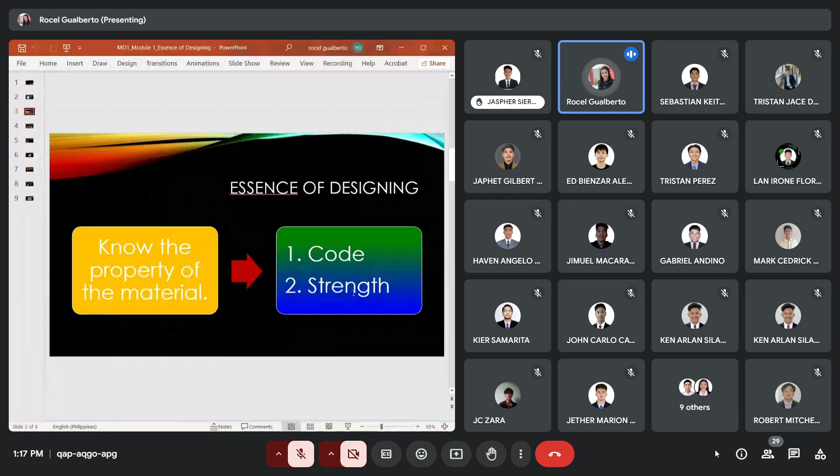Okay, so we have this design. First is to know the strength, obtained on our design table. So you simply copy the values of sigma u and sigma y doon po sa design tables natin. And then after that is for you to come up with the suitable factor of safety.

So for the factor of safety, we call this also our design factor, and it depends on these three: the kind of load, the type of material, and the basis of design. Indicate yung tatlong ito before you come up with your value of factor of safety taken from table 1.1. As for the kind of load, you are to assume a dead load if it is not given. And for the basis of design, you would be following yield strength for a ductile material and ultimate for the brittle material.

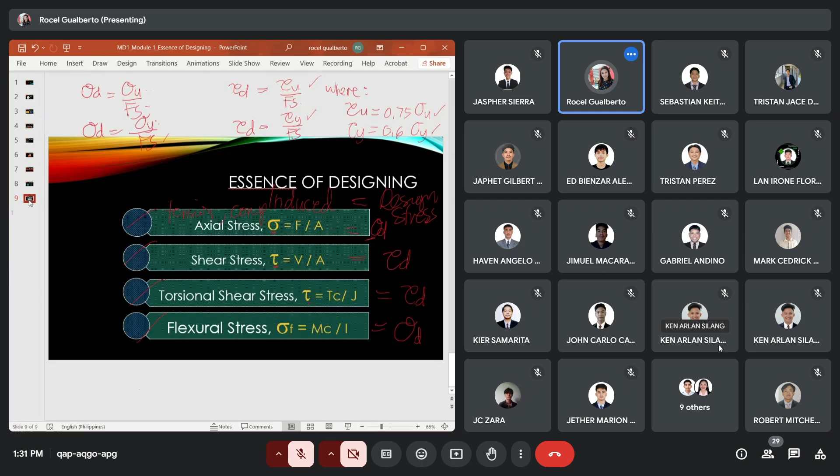Ito naman. Okay. Yan. Okay na ulit. Hello. Okay na ulit. Yes po, ma'am. Okay. Lagi nawawala. Wait lang. Ano napindot ko? Option. Okay, okay.

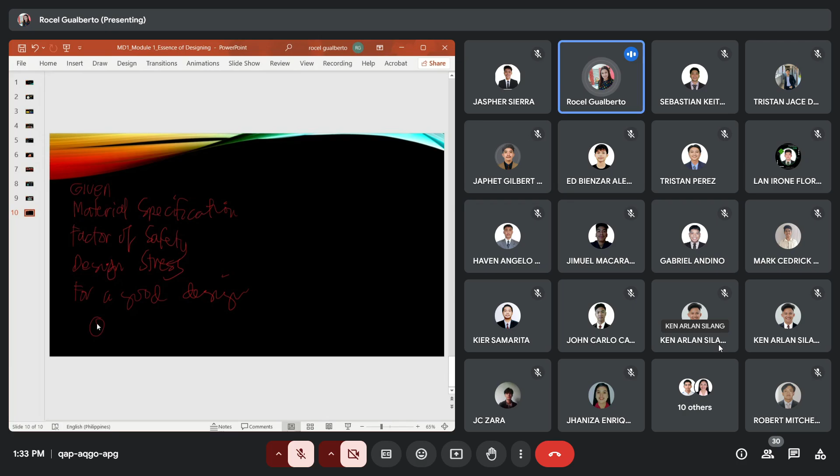Know the property of the material as to code and as to strength. So, ang tawag po natin doon ay material specification. Ang ilalagay po yung code at yung sigma U, sigma Y. Ang kasunod po nun, apply a suitable factor of safety. So, after po ng factor of safety, it's for you to determine the design stress. And then, kasunod po ng design stress, yung pang-apat, yung solution for a good design. You then equate the design stress to the induced stress of the material.

Okay, so ito po yung members under pure tension or pure tensile load. Ito po yung sample member po natin. And then you come up with this. Ano ang unang nangyari? You have there the elongation. Pertaining to the original length, nabago po yung kanyang final length, mas humaba. And also, you come up with this, that is the narrowing of your cross-sectional area. And we call that necking.

So, pag nilagyan po natin ng force, tensile load or tensile force, yung ating material, you come up with the elongation and the necking or the narrowing of the cross-sectional area. So, yan po ang effect doon sa material, because this force tends to pull your material. Hinihila po niya, kung saan ang ating force is a tensile load or a tensile force.

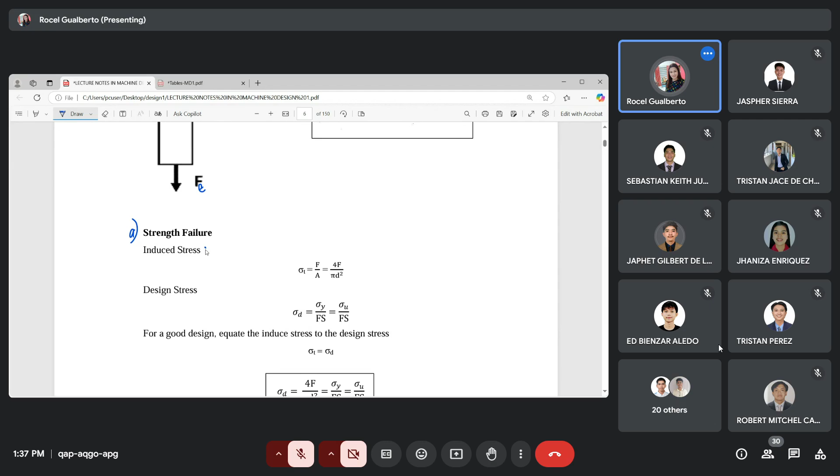So, ang tawag natin sa induced stress, sigma sub T equal to force, tensile force divided by the area. Okay? So, kung circular po yan, papalitan lang po natin yung area. So, the tensile stress would be equal to Ft over ano yung magiging area natin kung circular. That would be pi d squared divided by 4. Kung rectangular naman po yan, ano yung area doon? It would be base times the height or the length times the width. So, papalitan lang po natin yung area. So, ganyan po ang induced stress niya.

Pagdating naman po sa design stress, we say for design stress, it's equal to sigma u over Fs. Yan po yung design stress. Now, why are we using here sigma? Bakit po ma'am hindi yung tau? Kasi ang ating induced stress is tensile. And based on yield naman, then sigma d would be equal to sigma y divided by factor of safety. Okay, so titingnan mo ngayon yung problem kung ano ba yung basis of design.

Kung alin yung sinabing basis of design, edi pipili ka dito sa dalawang equation kung alin yung magiging design stress mo po. Kung hindi po binigay yung basis ng design, ano po ang gagawin natin? Ang gagamitin po natin yung default. Ductile is for yield, brittle is for ultimate. Yun po ay pag walang binigay na basis ng design.

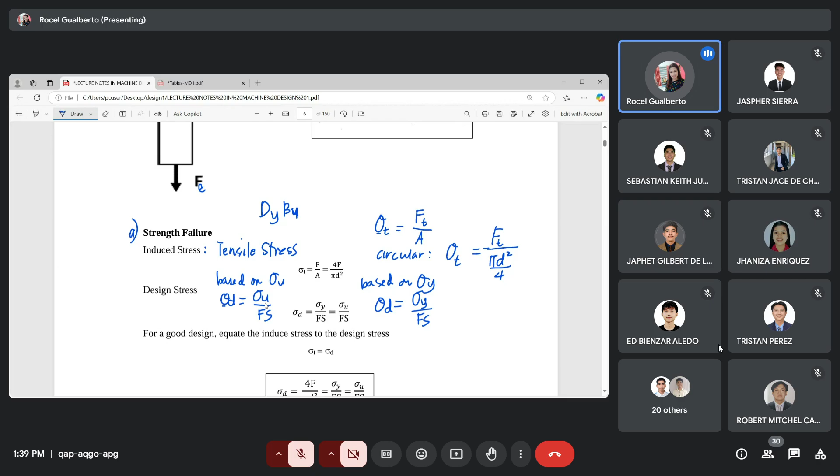Now, design for induced stress and the design stress. So, equating the design stress and the induced stress, ulitin ko lang po dito, for a good design. Equate now the design stress to the induced stress, which is the tensile stress. So, the tensile stress is simply force over the area equal to your design stress. So, kung yan po uli ay circular,

and based on ultimate strength, what will be our equation now? Yung sigma din natin magiging sigma u over factor of safety equal to Ft over pi d squared over 4. So this will become equal to 4Ft over pi d squared. Yes, Ft is usually given, therefore, we can solve for the diameter. So, masosolve mo po yung diameter base doon sa ating strength failure.

Kung base naman po siya sa yield, ano naman po ang magiging equation natin? Sigma y over factor of safety equal to, pareho po, pinalitan po natin yun. So, magiging sigma y over Fs, so this would be 4Ft over pi d squared. Nandito lang po uli sa table, tapos given, tapos you can solve again for a diameter.

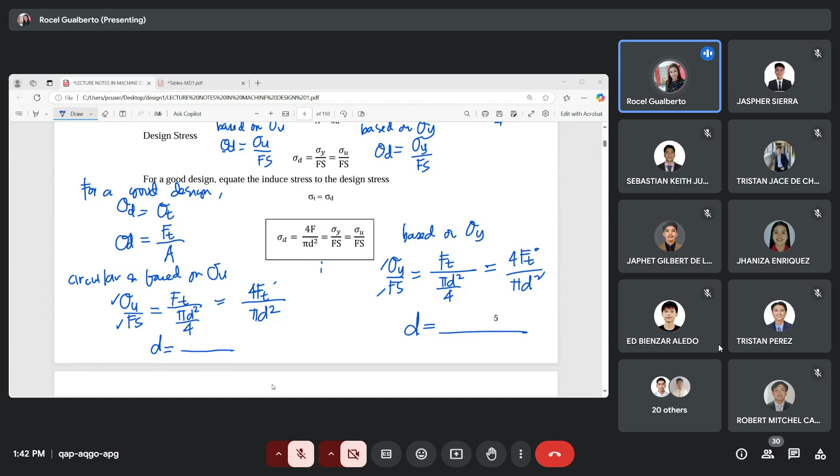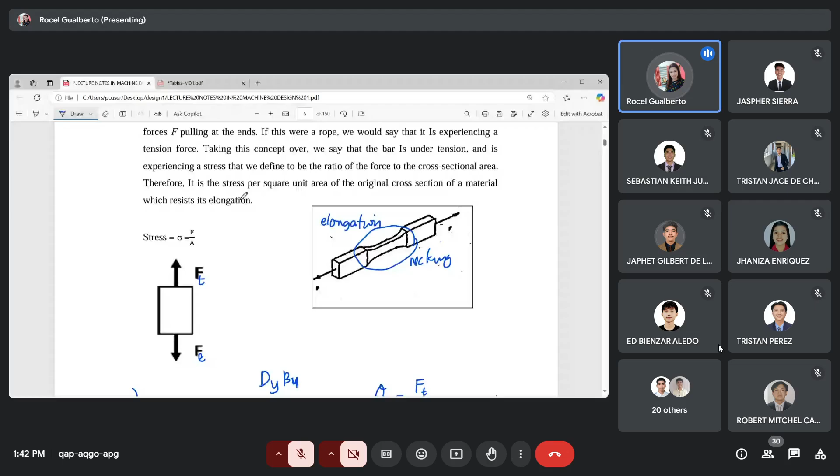So, sabi natin kanina, nung in-applyan natin ng load yung ating machine member, nagkaroon siya ng elongation at necking. So, base din doon, kukuha tayo ng dimension. So, ang tawag naman po natin doon, ito po yung pangalawa, that would be our deformation failure. So, kuha ka ng dimension base sa deformation failure.

Nung in-applyan mo po siya ng tensile load, humaba po siya. So, ito po yung na-increase na length po niya. Ang tawag po natin dyan, yan po yung deformation. But then actually, this deformation, yan na po yung elongation. So, this is basically a change in the length, the final length minus the original length. And how do you measure that deformation? Paano ba mina-measure yung deformation? The deformation is simply equal to FL over AE.

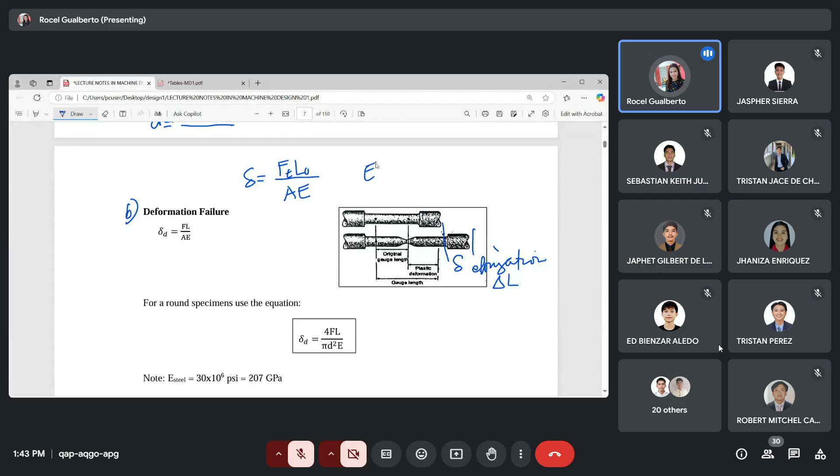Kung nare-recall nyo po yan, deformation is equal to FL over A, area of the cross-section, and E, the modulus of elasticity. So, modulus of elasticity po ang tawag po dito. So, saan ko po ma'am kukunin yung value ng mga components po na yan? So, ang Ft po, again, that is your tensile load. Original length po ito. Area and then modulus of elasticity.

So, kung yan po ay circular as our sample, yung A lang po yung papalitan. So, the deformation would be Ft L sub o over pi D squared over 4 times the modulus of elasticity. Kung siya naman po ay rectangular, ang area po ay magiging length times width or base times height.

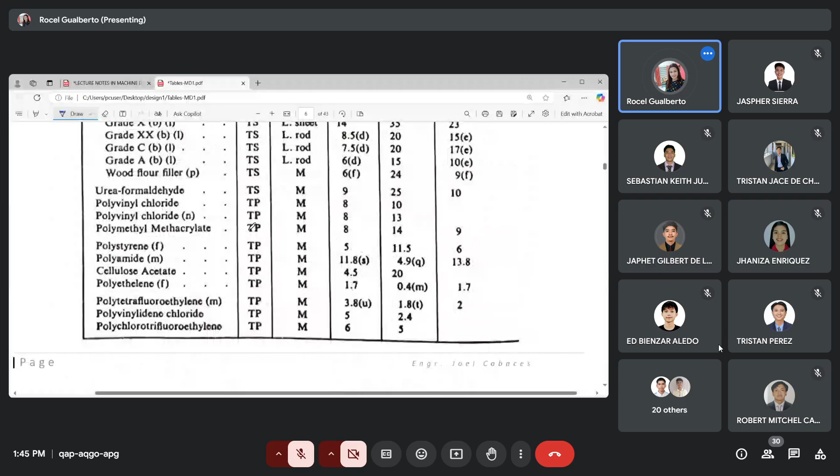Halimbawa, you go to table AT 7 po. Yan, okay. So, ano po yung table AT 7?

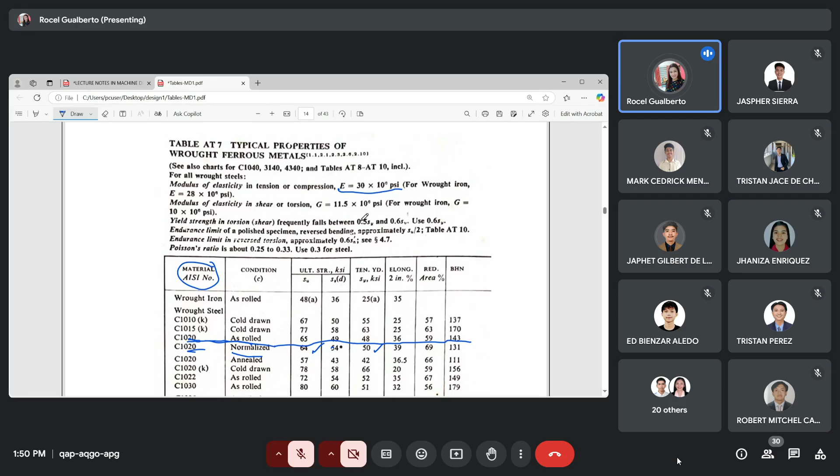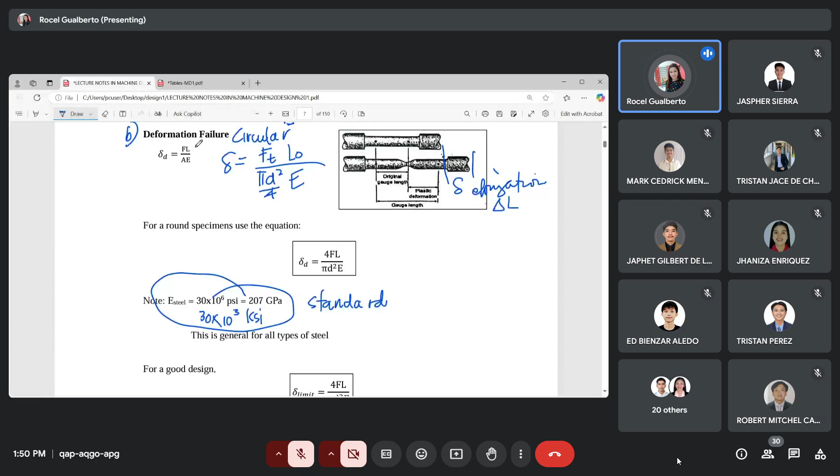Okay? Next. So, sunod po. How do we arrive at the dimension po? Okay? O, kapag nag-design po tayo. Katulad po kanina sa strength, anong sabi natin? For a good design, you equate the design stress to the induced stress of the material.

Dito naman po sa deformation failure, for a good design, ano po naman i-equate natin? We equate what we call the allowable limit of deformation to the computed deformation. So, we call this the allowable limit of deformation.

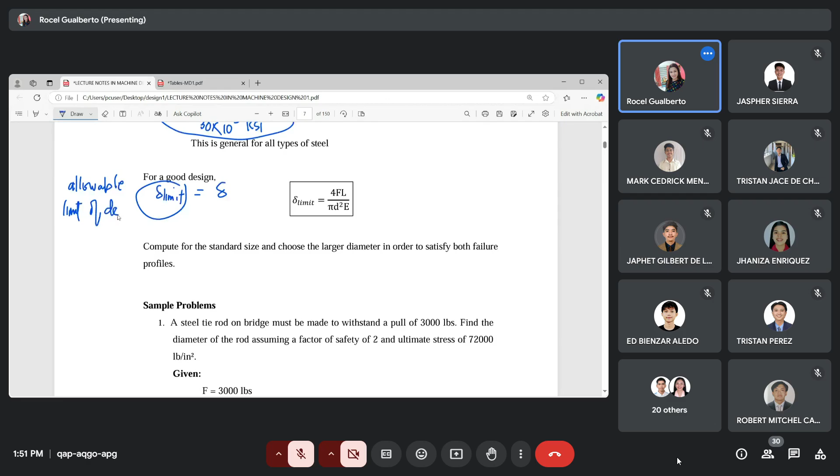Equal to the deformation itself, pi d squared over 4, equal to the allowable limit of deformation. So what is this allowable limit of deformation? In problems, sometimes it's stated that the member should not elongate more than 0.01 inch. That 0.01 inch is what we call the allowable limit of deformation. It means the deformation cannot be larger than that value. It is limited up to that value only.

So we can compute for the diameter. This is given: the force, the length, the E is taken from the table, then you can compute for the dimension or the diameter. So how many answers did we get?

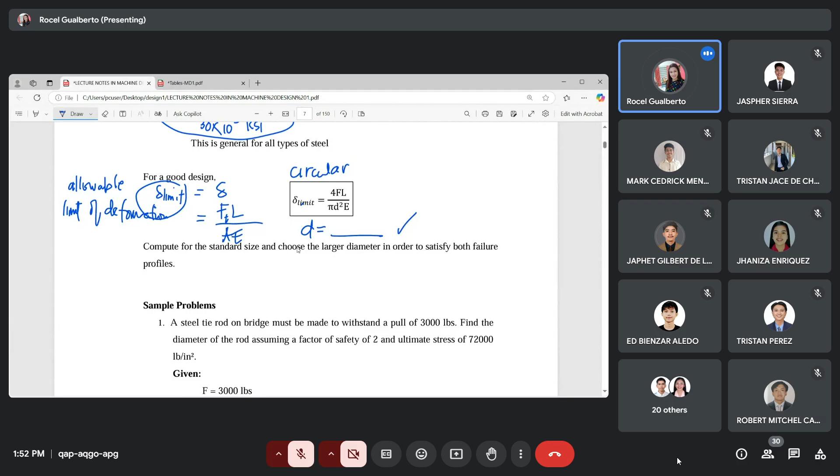One came from strength failure, and the other came from deformation failure. So we got two answers. But our final answer cannot be two. With these two, we choose which one is correct. You have to choose the larger diameter, or the larger dimension, in order to satisfy both failure modes.

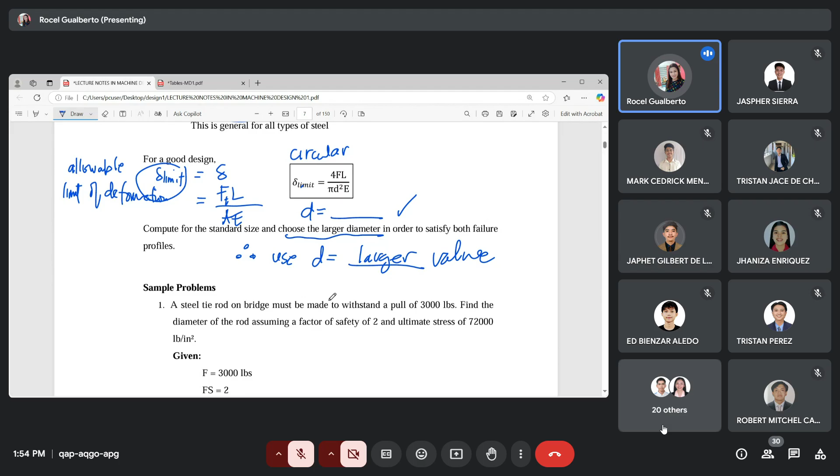Now, not at all times do we have deformation failure. It's not always present. It only happens when you are given this allowable limit of deformation. If there is no given allowable limit of deformation, our answer will only come from the strength failure, and whatever answer we get from the strength failure will be our final answer. Did you get what I said? Did you understand? Yes, ma'am, we understood. Okay, good. So let us have a sample problem.

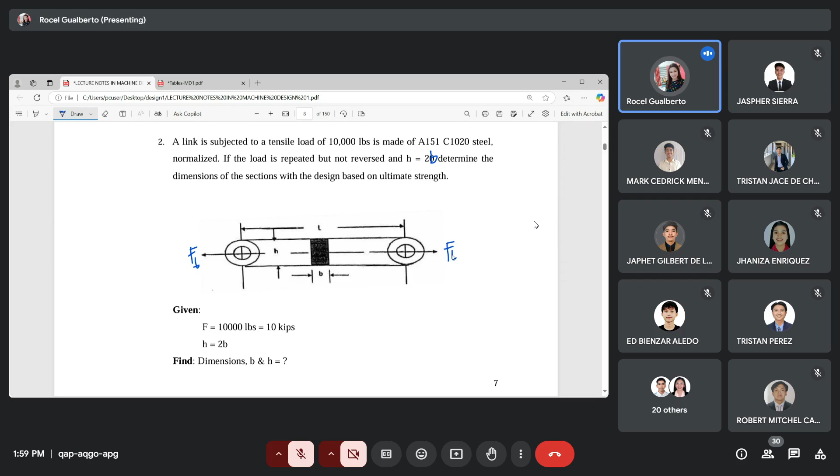So here is yung kung atin na link. This is the tensile load FT equal to 10,000 pounds, and this is its cross-section. And dimensions, H is equal to 2B. So let us then have this resolve.

I-resolve natin. And then, para mabago, ang gawin natin, instead of basing this on the ultimate strength, palitan natin, gawin natin ngayon siya na yield strength. So gawin natin based on the yield strength. Mag-solve ulit kayo, this time base naman yan sa yield strength. So hindi lang basta natin titingnan, or babasahin yung solution, kundi i-resolve natin kasi nabago na ang basis ng design.

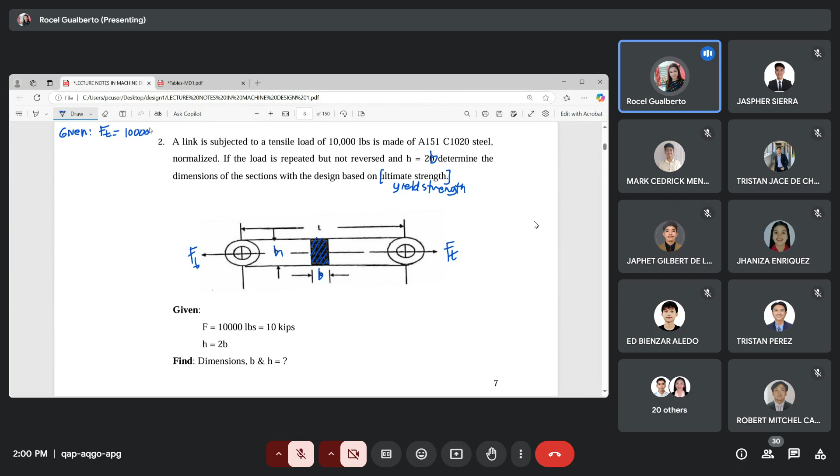Okay, let us start now. Here, you start with your given values. So ano po yung given natin? We start with the tensile load that is equal to 10,000 pounds, which is equal to 10 kips, divided by 1,000. Another thing, you have the relationship H is equal to 2B. So these are the given.

After the given, i-follow mo na po dyan yung atin na essence ng design. So ang una would be the material specification. Ano sa material specification? Code. So uunahin po ang code: AISI C1020 normalized. Tapos, ano po ang hahanapin? Yung sigma U, sigma Y, tapos idagdag mo na din po ang modulus of elasticity.

O, hanap muna po ninyo sa chat box ang sagot at ilagay din po kung sang table po natin nakuha. O, sige po, hanap muna po.

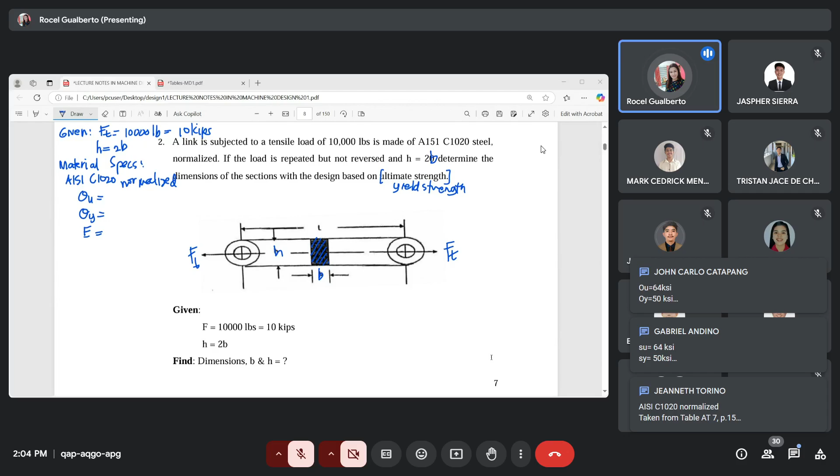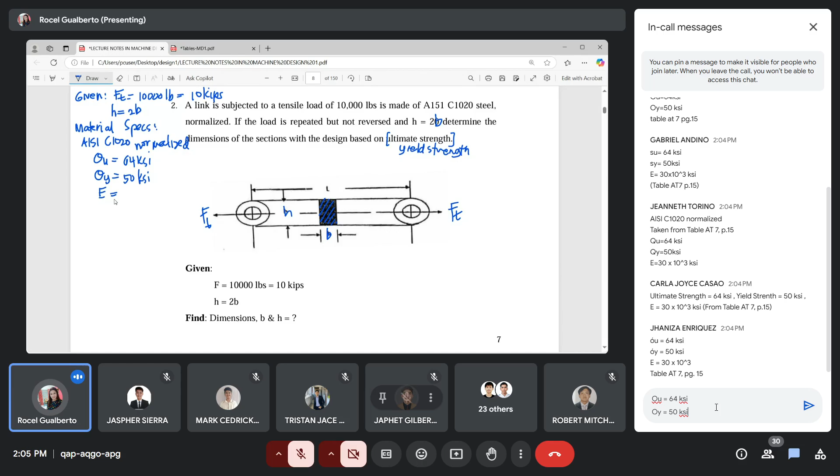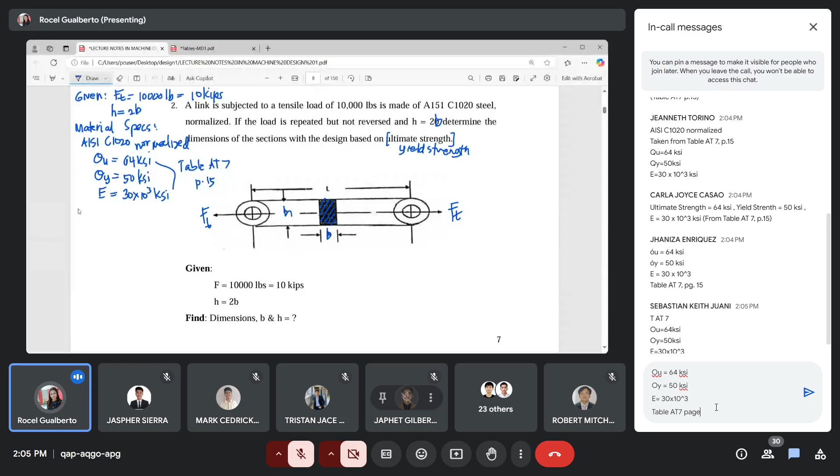After the material specification po, ang sunod po natin would be the factor of safety. Tatandaan nyo po ang procedure conditions, yun pong tatlong basis. Ano pong una? Kind ng load. Ano ang kind ng load? Stated po dito, repeated but not reversed. So, repeated but not reversed.

Tapos po, type ng material. So this is 1020, ano pong type ng material? AISI C1020 normalized. Ken Arlan? Yes po, ma'am. Ano pong type ng material? Ductile po ba o brittle, itong 1020 normalized? Ductile po, ma'am.

Hello? Hello po, ma'am. Ken? Hello po. Ductile or brittle ba yung 1020 normalized? Ductile po, ma'am, it's a ductile material. Bakit po siya ductile?

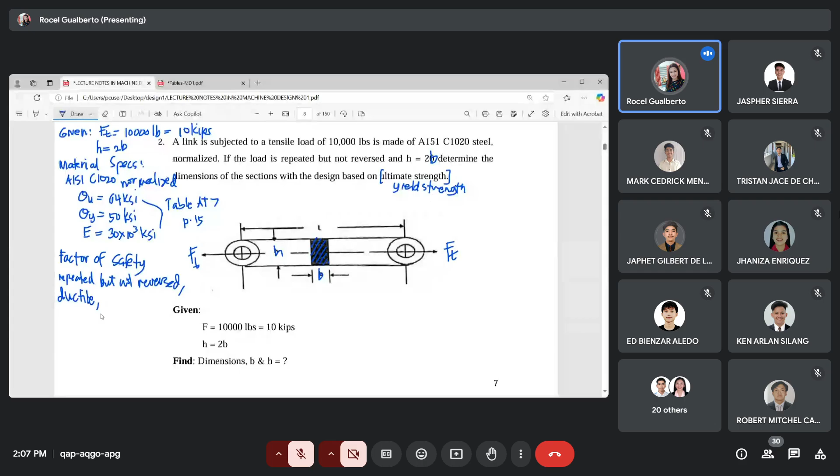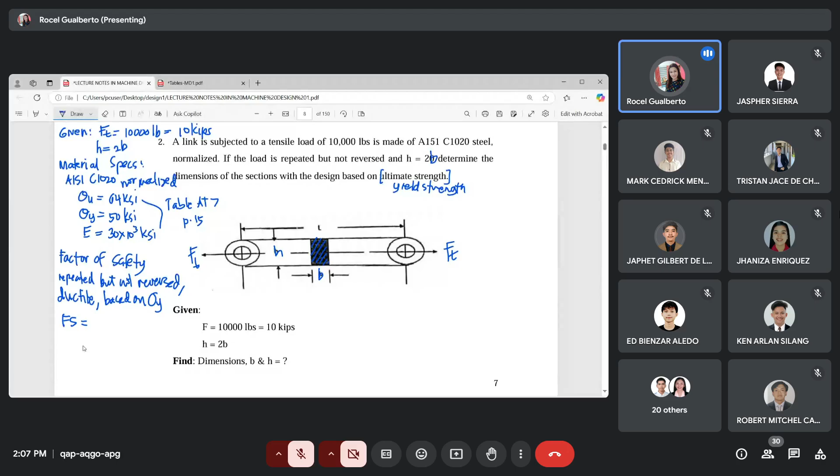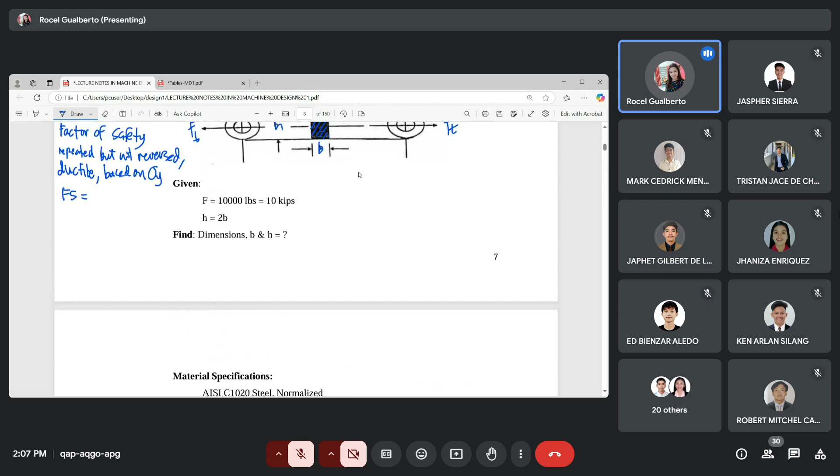Dun po natin siya titingnan sa table 1.1. Based on the yield, ano po yan? Equal to 3. So yun po ngayon yung ating magiging factor of safety. Fs is equal to 3, galing sa table 1.1, page 1.

Okay, and then after the factor of safety, ang kasunod po would be the design stress. Sa design stress, pipili lang tayo between sigma D and tau D. Ano po ang gagamitin natin dito? We will be using sigma D, dahil ito po ang ating induced stress is a tensile stress which is in form of sigma din. So sigma D equal to what?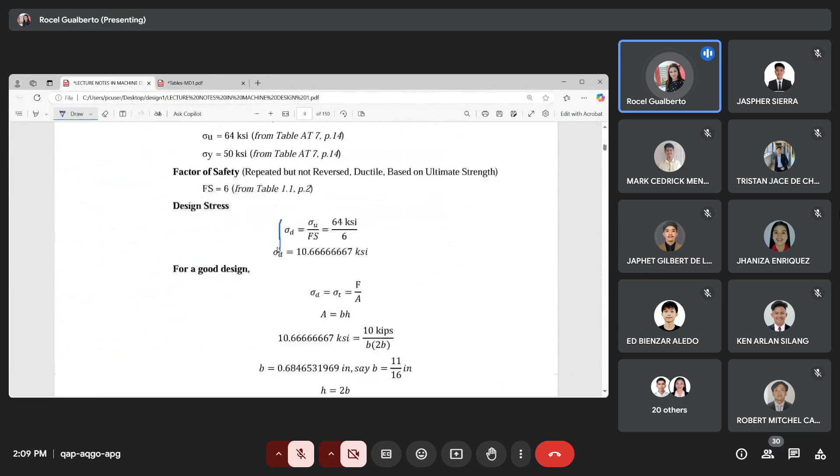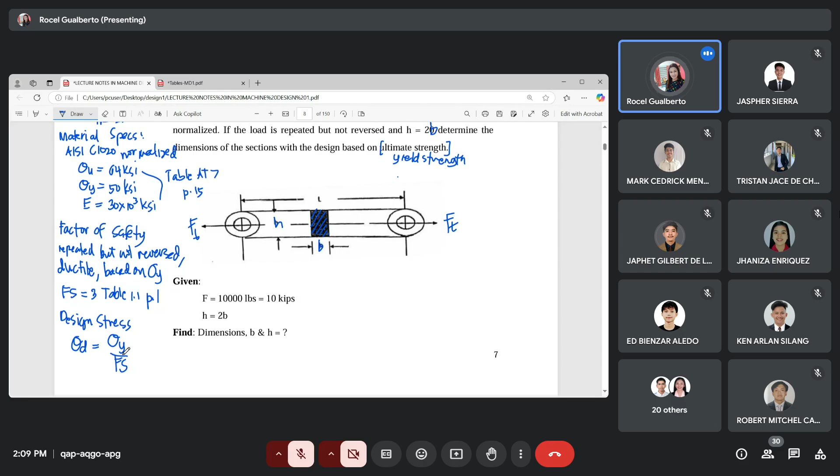What is our basis ng design? Okay, this is based on sigma y, kaya ang ano, nakita mo? Sigma u over fs. Bakit? Kasi ang original niyan, based on design, based on the ultimate. Okay, pinalitan natin, based on yield na, kaya sigma y over fs na po. Yan, so tapos, yung solve. I-a-ano na po to, isa-substitute mo yung value. So, sigma d is equal to, ano yung sigma y?

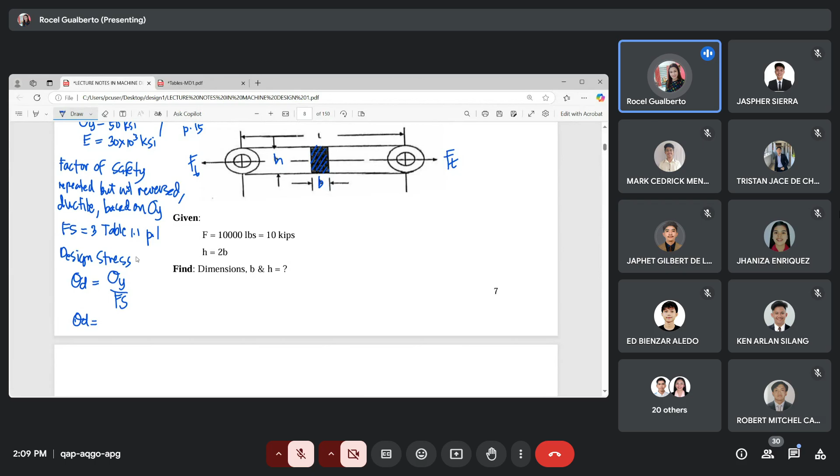So what is our answer? You substitute the value of y, sigma y, and fs, then we yield... 16.667. Okay, thank you.

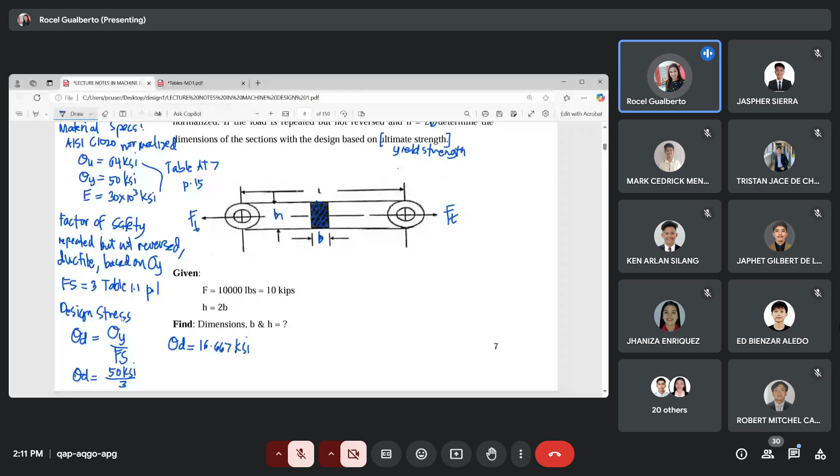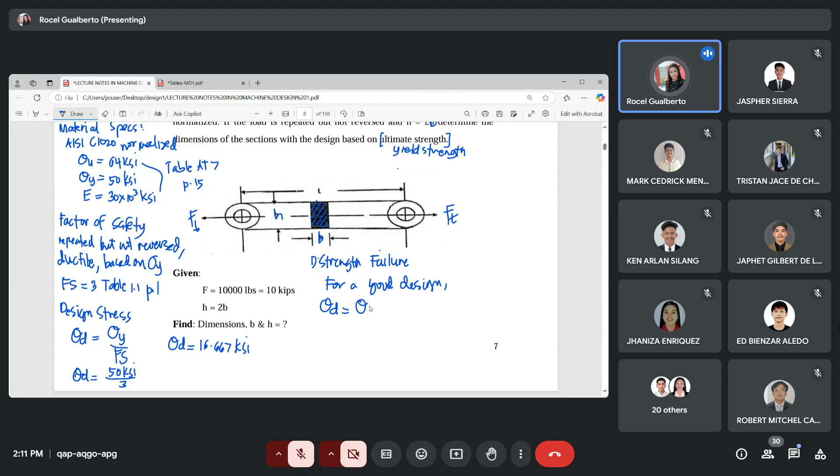You need to equate the design stress to the induced stress. The area would be base times the height equal to your FT. Now you have here two variables, so you express one in terms of the other.

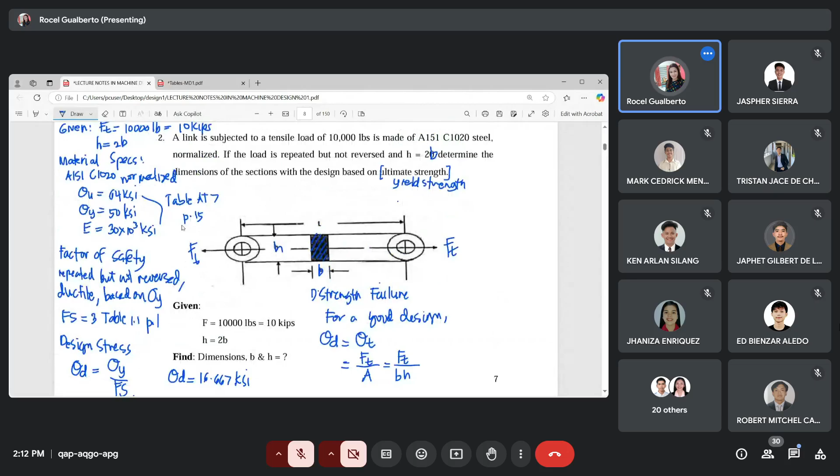There is a relationship given that your H is equal to 2B. So in place of H, we replace it with 2B. So this becomes FT over B times 2B, so we come up now with FT over 2B squared equal to your design stress.

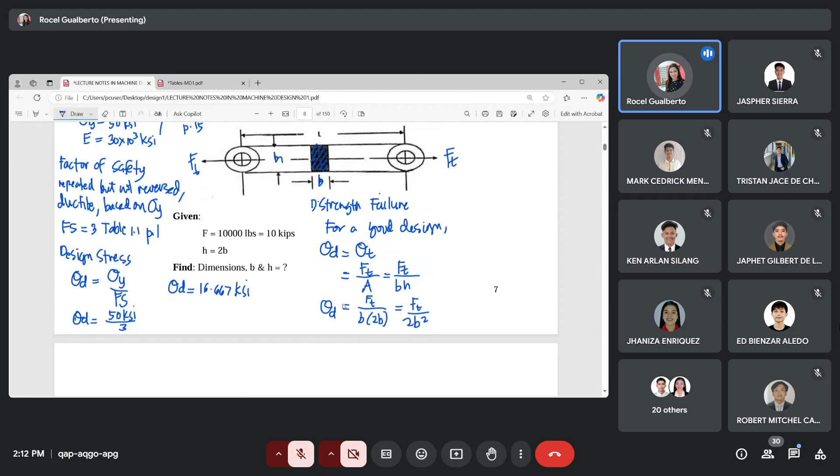Okay, substitute the values. So what are our values? What is the design stress? Let me check this. Design stress is 16.667 KSI.

Equal to what is our FT, equal to 10 kips. You can now solve for the value of B.

So what is then the value of B? Please solve, please compute. What is the value of B?

Marion, this is 0.5477 as the value of B.

Okay, so for others, you yield the same. Let's check. Let's continue. So, 0.54... what again? 548. Okay, we can have it written as 0.548 inches.